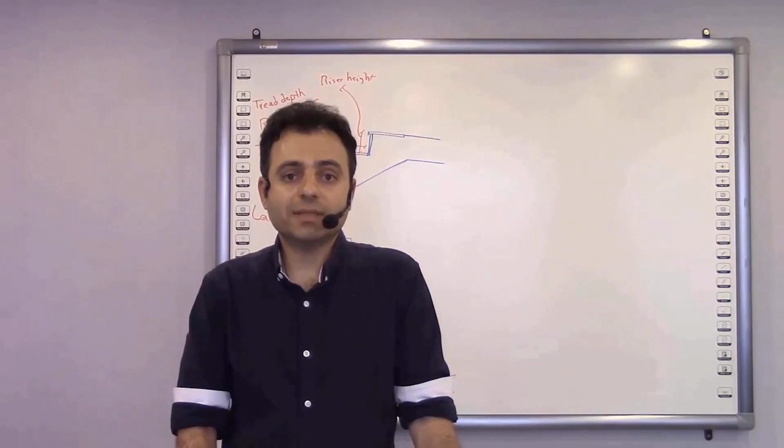In this session, we want to discuss the stairs. But before we start analyzing it, I want to explain something to you and also ask you a question. Until now, we've learned some of the tools like the wall, the doors and windows, and the floor. Now, imagine, for example, something like door and window. If you remember, these two had two types of arrangements. One of them was properties, and the other one was type properties.

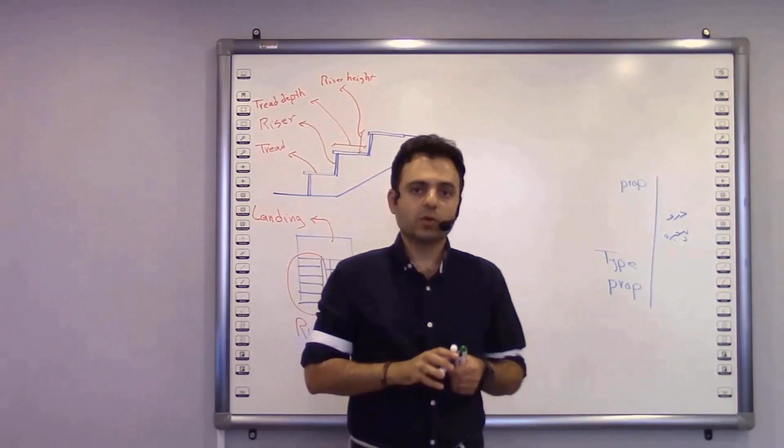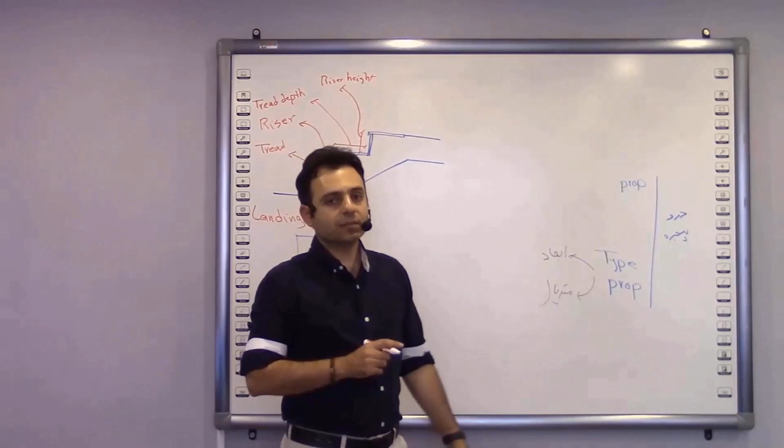And if you remember, properties is the palette that is always in your page, but type properties is the one that when you click on edit type, you can see some settings. That's type properties. Now, about door and window, what settings did we have in properties? Or what did we have in type properties? Can you say? For example, in type properties, that's right, we had dimensions and also materials. But what do we have in properties? That's right, OKB, or the right way to say it is sill height. We have this in properties too.

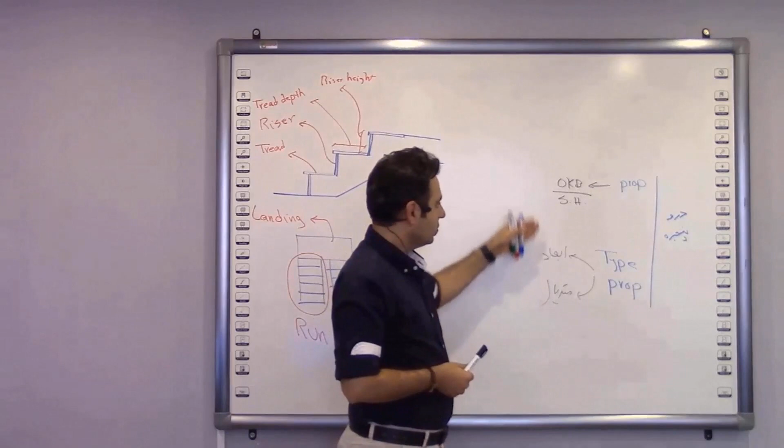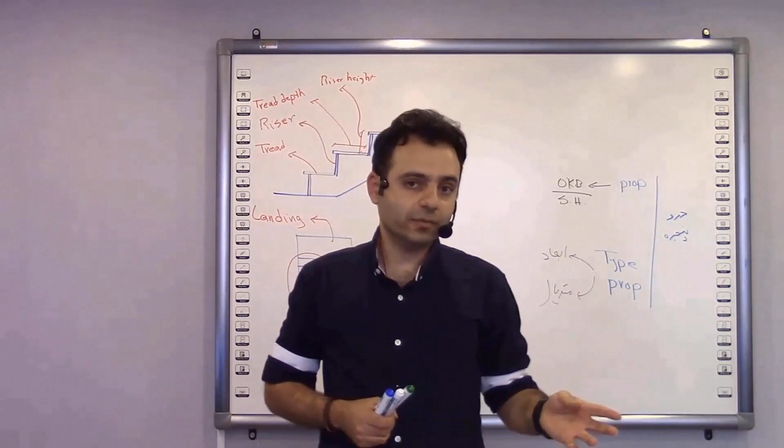Now there's a question here, and that's why it has divided these parameters into two groups, some of them in properties and some of them in type properties. Why? Or for example, why isn't the OKB in the type properties? Or why isn't the dimensions in the properties? The main reason is that if we change the parameters in type properties, the rest of the parameters will change too. But the parameters in properties, when we want to change them, only that selected object will be changed.

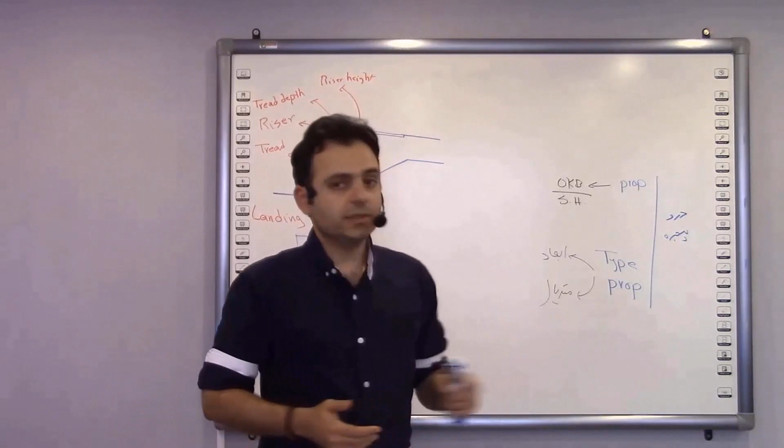So here we can say that properties is about the separated and single features of an object that if they change, the rest of them will not. But type properties is about the features of the objects in the same type that if you change one of them, the rest of them will change too. That's right. So today we want to talk about the stairs and also analyze the properties and the type properties of it. But before we start anything, we need to know the names of different parts of the stairs. Well, I'm sure you're already familiar with them, but I just say it once to be certain about it.

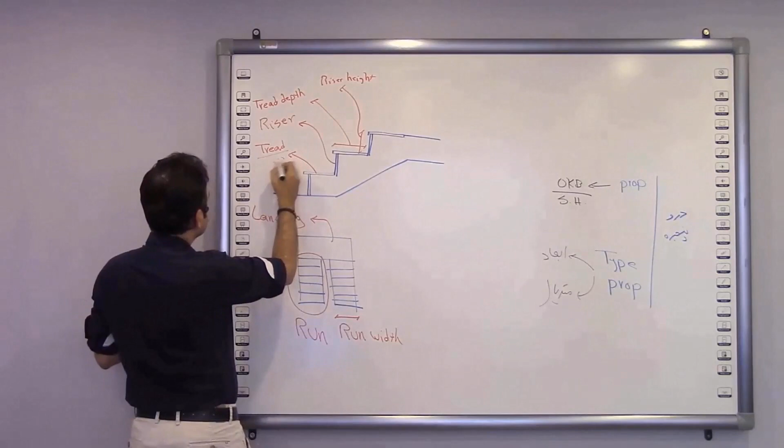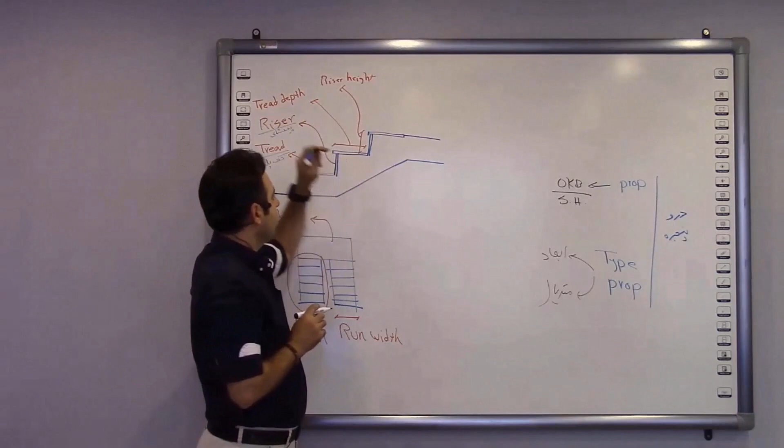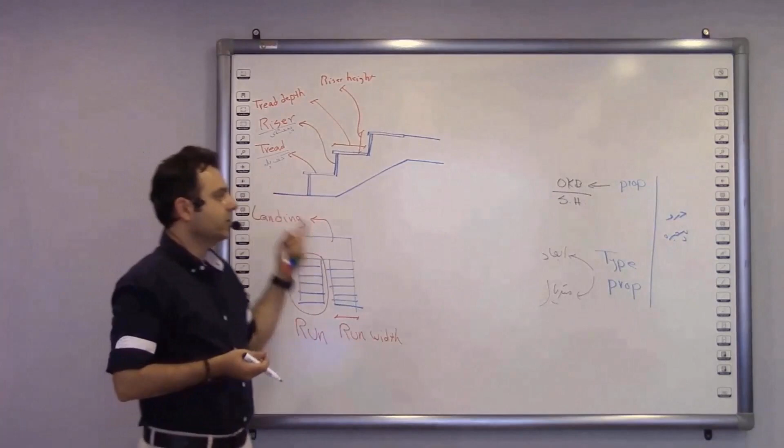Now, this is a section of the stairs, and as you already know, we call the floor of a stair the tread, right? We call this part of the stair the riser, right? Riser. The size of the tread is called tread depth, alright? Tread depth, the size or depth of the tread. And the height of each stair is called the riser height. You actually need to know these expressions and words, because if you don't, when we want to go for the properties and type properties of the stairs, you cannot recognize them.

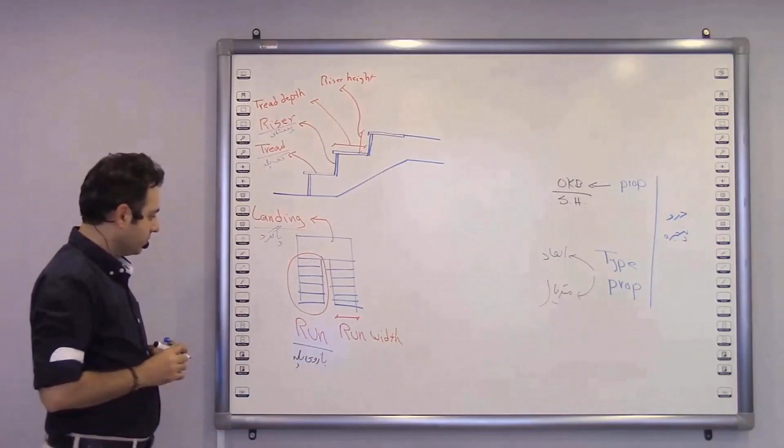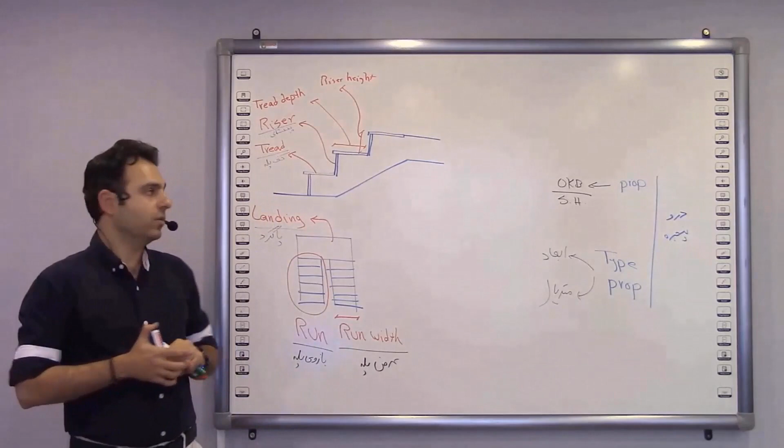Alright, let's go to the plan. Now imagine that we have these stairs, and what is this part called? We say these stairs have two runs, so we call each of these a run. So these stairs have two runs. Now what is landing? Well, definitely it's so clear. It's the landing, where you land. This is called the run width, which is still clear. The run width. So, as I told you, these expressions are really important. You need to know them all because you're going to use them a lot when you go to the software, and well, you need to memorize them all so that we can go to arrangement of properties and type properties.

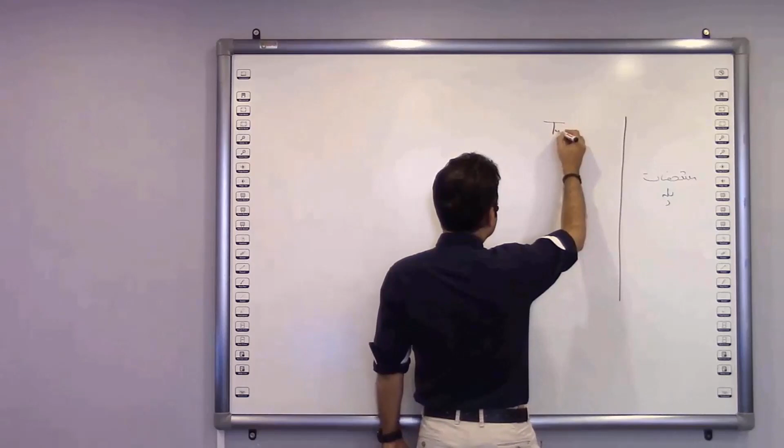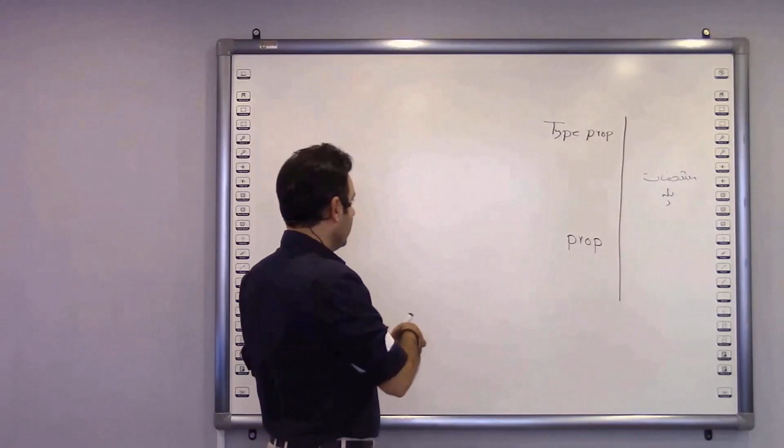So let's go and analyze the features of the stairs, which is properties and type properties, and now we know the difference too. So the features of stair. And just like we said, stair, just like the rest of the objects, includes properties and type properties. First of all, let's go for the type properties. When we want to arrange an object, it's better to go for the type first. It's actually from whole to fraction. So type properties and then properties. In type properties of stairs, we have three main arrangements.

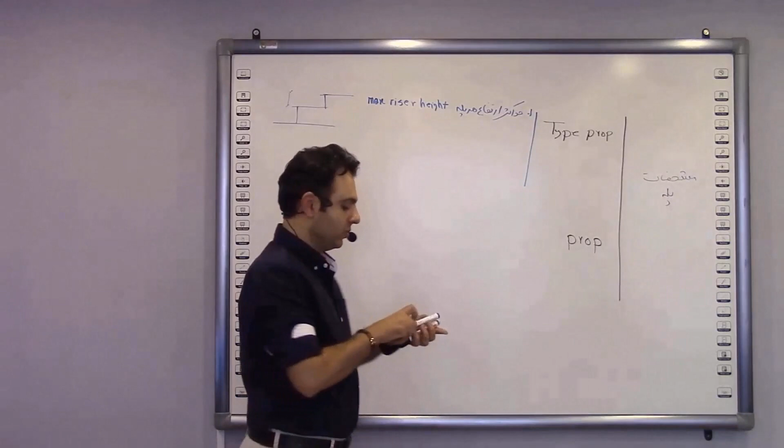1. The maximum of each stair riser height, right? For example, if this is our stair, we should say the maximum of this height here. Alright? The maximum riser height. How much do you think it is? Well, I should tell you that it's usually 17 in the residential buildings. But I say, for example, 18. Why? Because I want to have more space. Maybe even 20. Why again? Because, for example, I want to have a MEP stair. Actually, I can manage this maximum riser height. It can be 20.

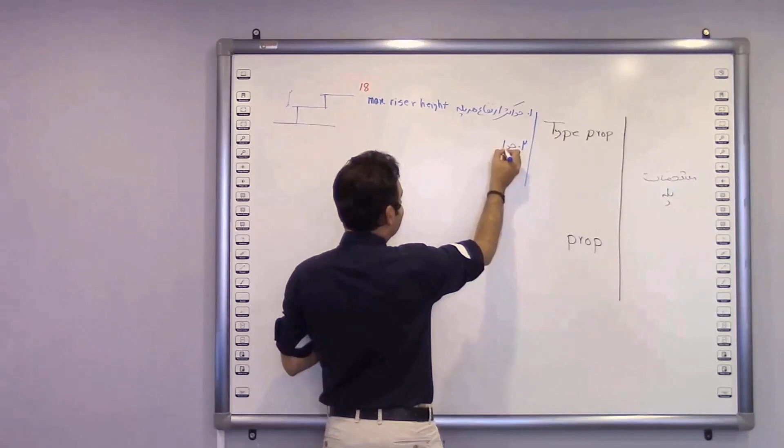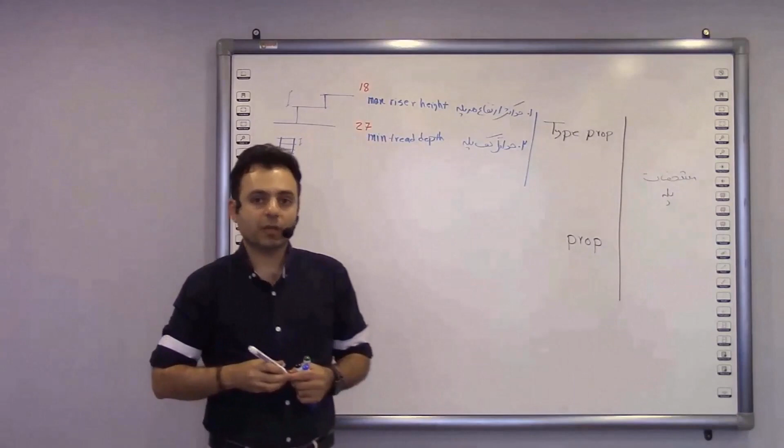Now, number 2. The minimum tread depth. That's right, the minimum tread depth. And actually, if this is our stair plan, we should say this must have a minimum. Now, what is it? What do you think it is? Well, we know that it's usually 30, but I say it's, for example, 27. Maybe sometimes I want to have a 28 centimeters tread depth. It can be even 30 because I said it's minimum, if you pay attention.

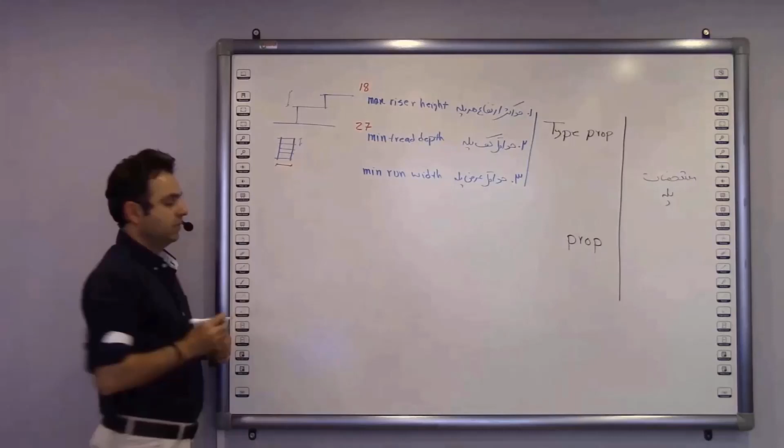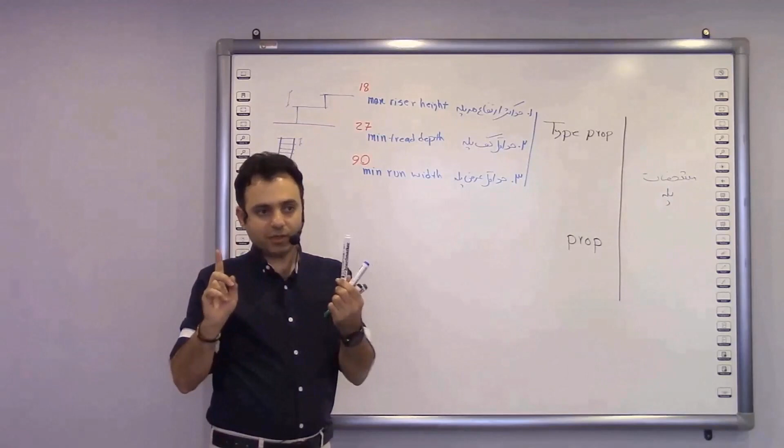Now, 3. The minimum run width, alright? The minimum run width. That, if I want to show you in the plan, it's this, alright? The minimum run width, which is usually 90, but we don't want it to be less than 90. And do you know how they calculate this 90? Actually, they consider the width of each person's shoulder to be 60 and 30 for the space around that person, which becomes 90. These are 3 parameters of the type properties.

Now, let's go to the properties. In properties, 1, the height of the entire stair. And this is actually determined by the level. We say, for example, level to level. Alright, for example, level 2 to level 3. 2. The actual tread depth. Alright, let me say it again. The actual tread depth. That's right. And actually, I will explain it to you later more.

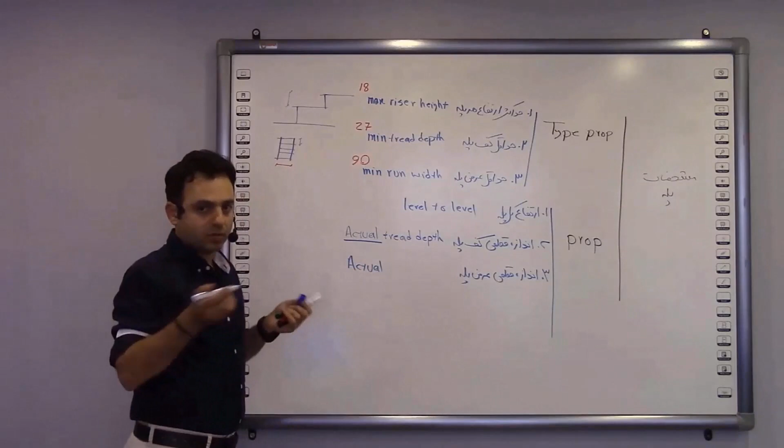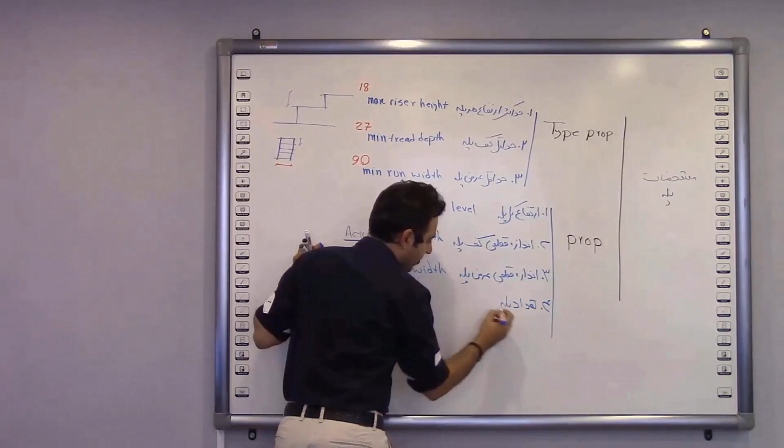Now, 3. The actual run width. Again, actual run width. Actual is actually there. That's what it means. It's real. Now, number 4. That's right, the number of the stairs. Or actually, the right way to say this is the desired number of stairs. Alright? Desired number of stairs, because it's the number that we want.

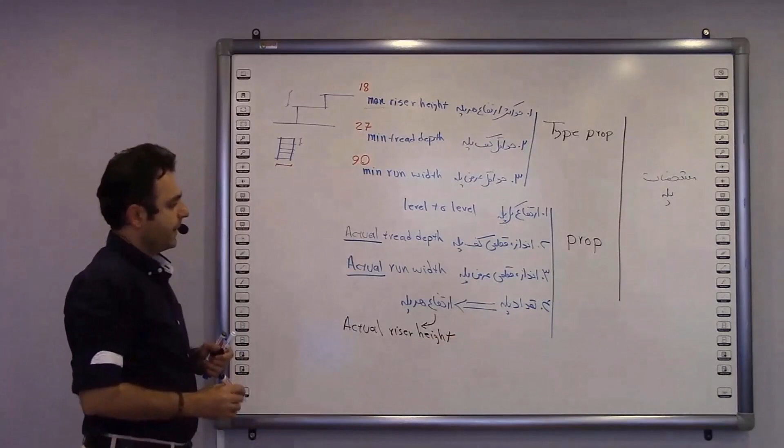It also gives us the actual riser height, right? The actual riser height. You know, we had the maximum riser height, now it gives us the actual riser height. And actually, this part, this desired number of stairs, has a lot to talk about, and we will discuss it later. Alright.

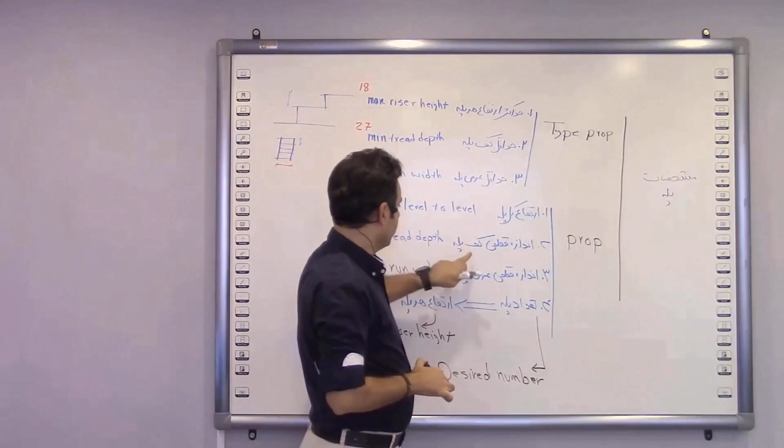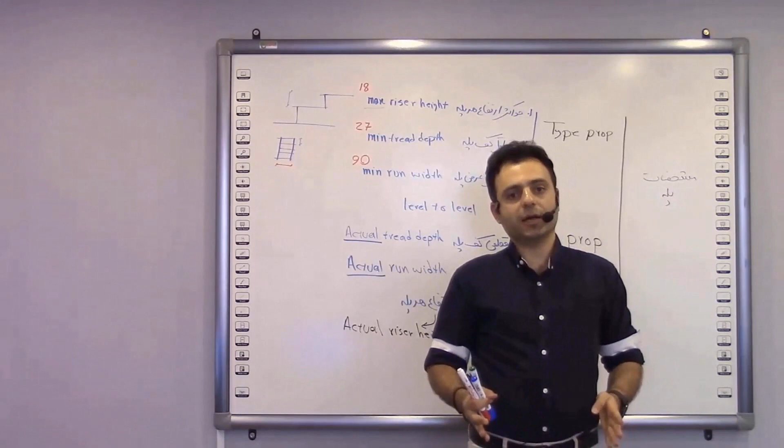Now, a question. Why do you think that we talked about, for example, this tread depth 2 times? Why? I mean, it has a number here and it also has a number there. Well, I can say it's so clear because here we are making some standards, right? We say, for example, all the stairs must be at least 27. We create a rule and then we start drawing that stair. And when we want to draw a stair, we say, what is the actual tread depth or run width? For this specific stair, we use this actual, alright?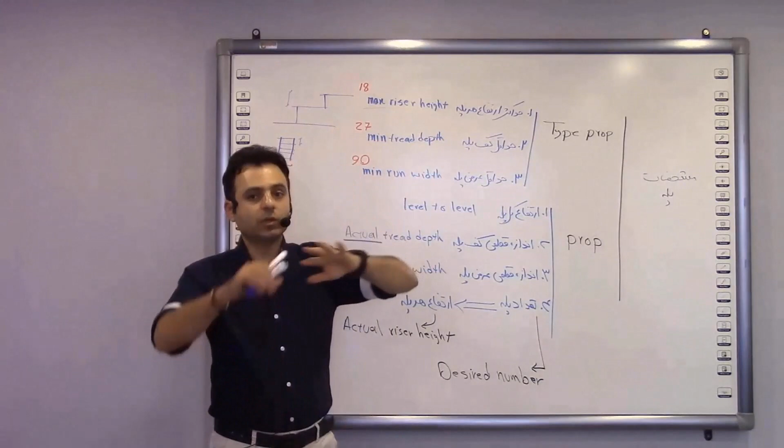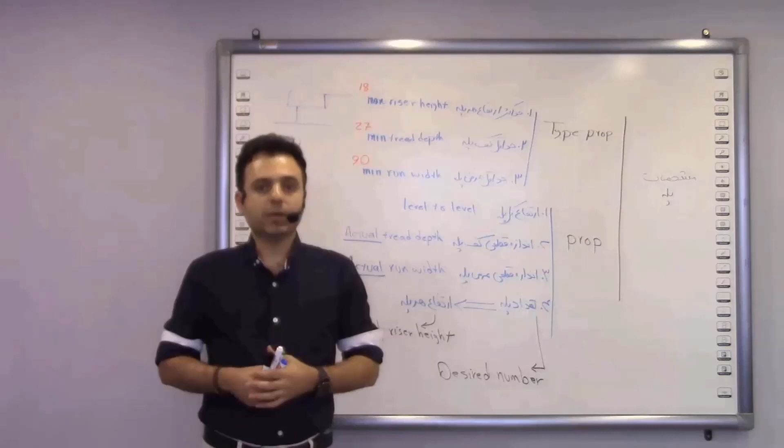In type properties, we create some standards that include all the stairs. But properties is about the specific properties of that stair. And when we say actual, it's about the dimensions that we're going to draw in the same moment and the same stair. So, in order to learn this completely, first of all, I draw an example here, and after that, we will go to Revit so that we can understand it better. So, to start, let's draw these stairs first. And don't pay attention to my drawing, just pay attention to the parameters that I give you.

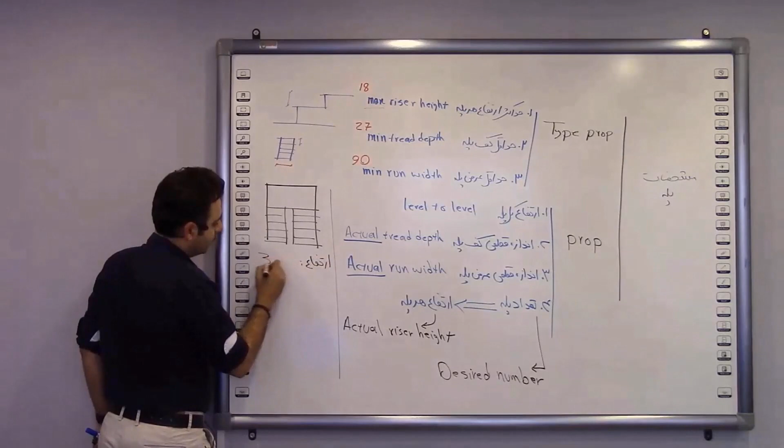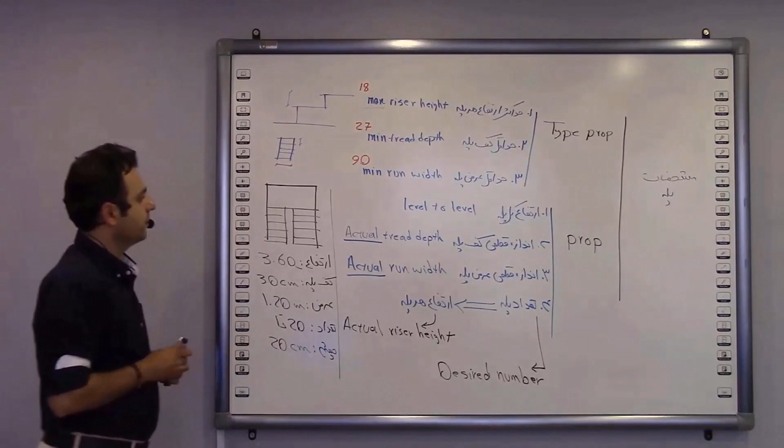The height 3.60, the tread depth 30 centimeters, the run width 1.20. Then we have the desired number of stairs, which is 20. So let's go and draw this and also try some other examples too so that we can understand it in a perfect way. Let's go.

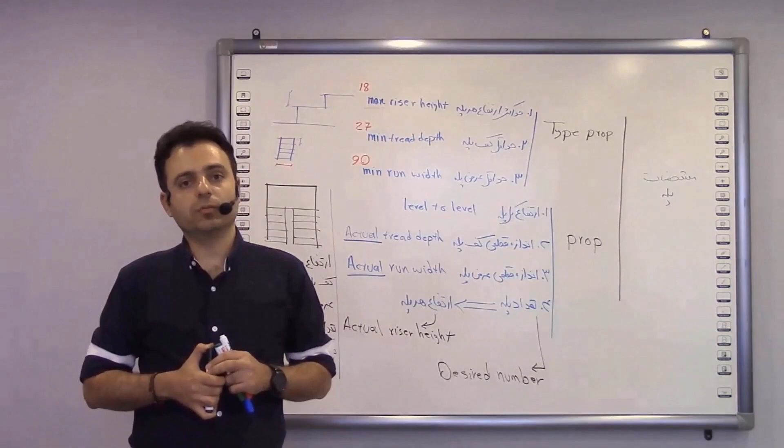Alright, now we are in the software and we want to analyze all of this in Revit. To activate this stair, first of all, we go to the Architecture tab and then Circulation, and then we can see the stair. In the old versions, we had an arrow by the stair that had 2 types. One of them was a sketch, which fortunately has been deleted because it was never useful. So I click on stair. Now, as usual, we first manage the settings of the type properties. So I click on edit type and then duplicate. For example, the exterior stairs.

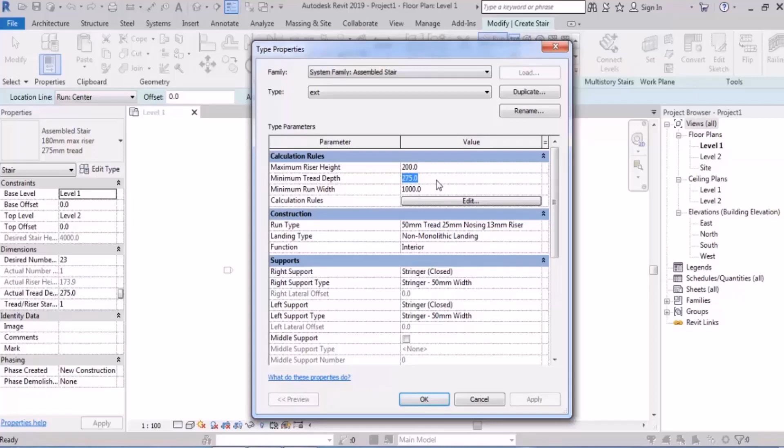And then we have the 3 parameters that we talked about, the maximum riser height. Now in these stairs, the height of each riser is 18, but we want to consider it 20 so that we can have more space. Maybe we want to draw an MEP stair that we need to be 20, more than 18. We know that the standard is 18, but I consider it 20. Then we have the minimum tread depth. The tread depth that we want to draw is now 30 centimeters, but we want it to be 27, alright? It's not that important actually.

Then we have minimum run width. In the example, it was 1.20. Now I want it to be 90, alright? And remember that it's minimum. So we managed 3 dimensions here, the riser height, tread depth, and the run width. And all of them were minimum.

Now, the settings in properties. First of all, I said we should determine the height of the stairs, and it should be from level to level. From level 1 to level 2, and here it tells you about your desired stair height, which is 4 meters. Remember something, that during drawing the stair, you cannot change the height of the level. For example, if it is going to be 3.60, you can't change it anymore.

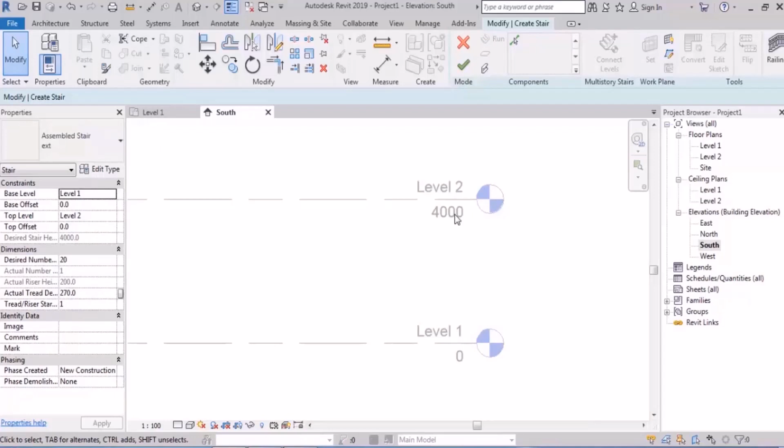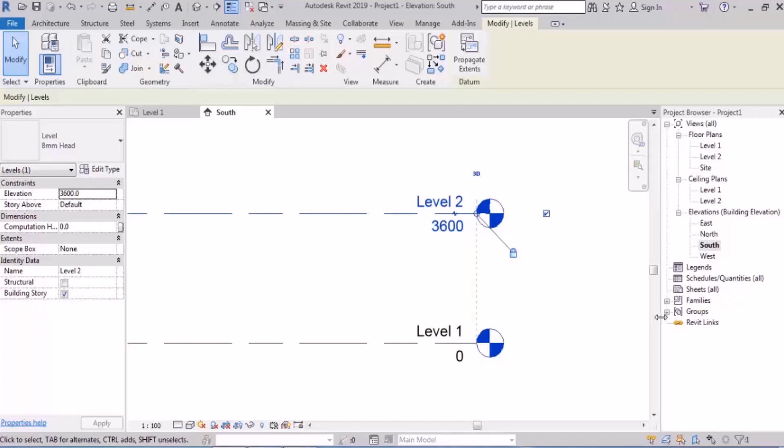So what should I do? I should click on finish here, and then it tells me you haven't drawn anything. Why would you want to finish? So I have to cancel it and then exit. And after that, edit my level height. And then I go back to the stairs. So remember that. Well, we can draw it and then change the height, but it's not recommended, right? So always remember to check the level height and then go for the stairs.

I go back, architecture, stairs, edit type, duplicate. Then it says that we already have this. Well, we made it before. 200 for the riser height, 270 for the tread depth, and 90 for the run width. And here it's from level 1 to level 2, the desired stair height is 3.60. And now we go for the desired number. Now this desired number is going to be 20, isn't it?

Now a question. Can I consider this desired number 200? Now you need to answer based on the previous standards. I told you some rules about minimum and maximum, if you remember. So, can it be 200? What is your answer? I'm sure you feel that 200 is a very strange number for this, don't you? And you might think that we face an error now, but we don't. Why? Because when it is 200, the actual riser height will be 18 millimeters or 1.8 centimeters. And did we have a minimum for riser height? No, we just had a maximum. So we will not face any error.

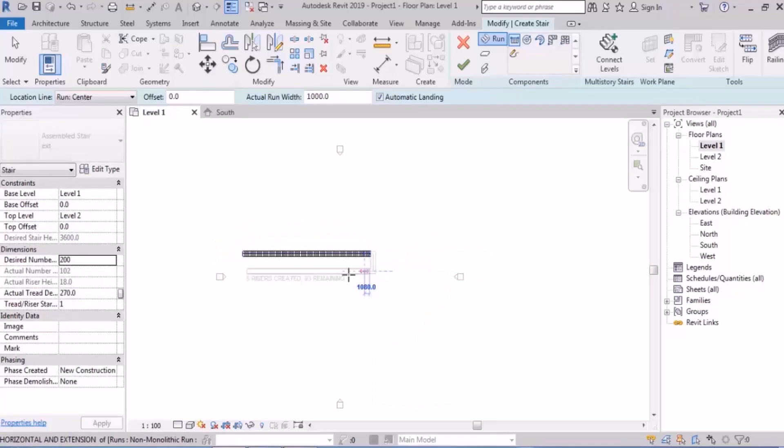But you might think, so what? What is the use of it? Well, I tell you, it's so useful. And what do you think the function is? Well, I should tell you that we can use it for a ramp. You see it? It's so useful, we can use it for a ramp. You know, these ramps that are for cars, and that's it.

Now, one more question. Can we change this desired number to 10? If it is 10, the actual riser height will be 36, right? And it will be more than that maximum number that was 20, if you remember. So when I move my mouse out, I will face a warning. Now, one more thing. I want you to know that what we are seeing now is a warning, not an error. Here it warns us, it tells us something. Now what is it saying?

It's telling us that the actual riser height, the riser height that we are drawing now, is greater than the maximum riser height, right? The maximum was the standard. The actual riser height is the riser height we are drawing now. Alright, the actual riser height, when the desired number is 10, is more than the maximum number that we determined. And then it tells us that we need to change this in order to avoid this situation. So maybe I say, okay, I get it, but I want to keep doing what I want to do. So it doesn't stop you, but it warns you that you're going against the standards you defined yourself. Anyway, the desired number is 20.

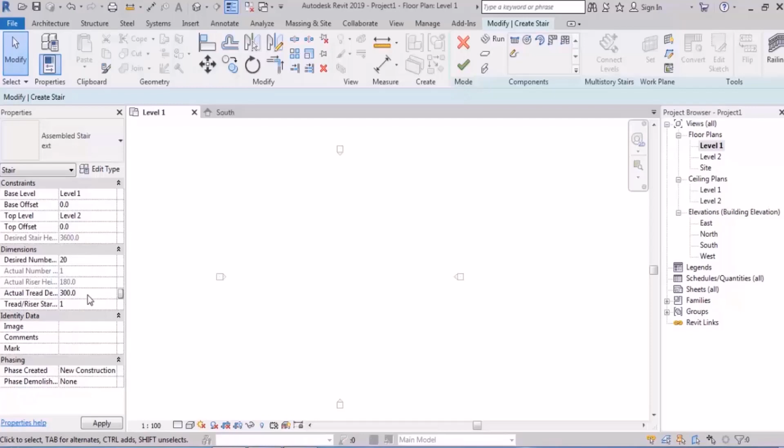Here we have the actual tread depth. The actual tread depth, which is related to this stair, it's not a standard. We say that the actual tread depth of this stair is going to be 30 centimeters. Pay attention to one thing. When you have finished these settings and you want to start drawing, you need to click on this run here, and it's usually already activated, but if it's not, you click on it and you see some properties here too. So if you see they're not here, it means that you haven't activated the run. So when I click on it, I can have access to the actual run width too. The actual run width would be 1.20.

Now everything has been done. The height I said was level 1 to level 2. The desired number, the actual tread depth, and here we have the actual run width. Now let's start drawing. To draw the stair, first of all, you need to choose a spot to start it. So let me zoom in a little so that you can see the words better. So I go to Options, Graphics, and I change the size of the words. And you don't need to do this, actually I did it so that you can see it better. Alright.

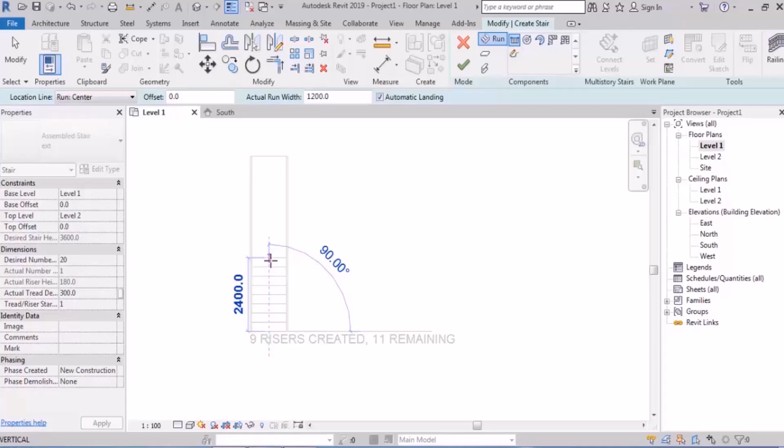Now, check this out. When you click and you start drawing, as you can see down there, it shows you how many risers have been created. As you can see, it says until right now, 9 risers have been created and 11 risers have remained. Now I want to have 10, so I go up a little more, and now that's right. And now I continue this to the right a little, and then I click, and that's it.

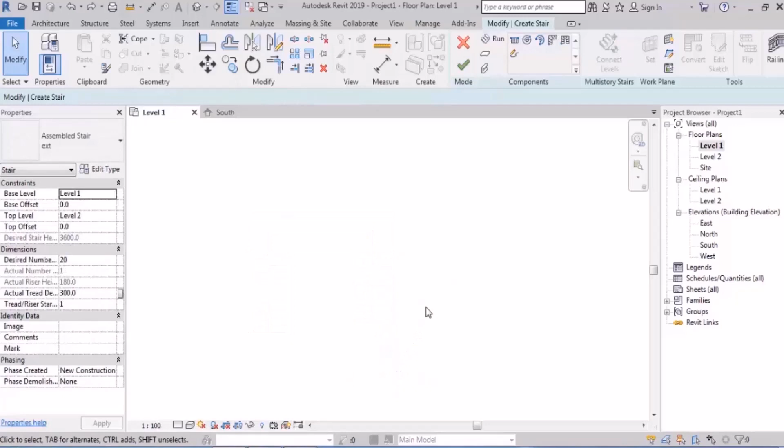I go down now. Now here I don't need to count anymore because it doesn't get more than it is, you know. And then I click. Let me undo and do it again. So we were supposed to click on run if we didn't have these properties here. The run width was determined, so let's start drawing.

First I choose a spot to start. Then you should drag it up. Now we have 20 stairs, we want 10, alright? So I drag it until here and then click. Then I continue that to the right, again one more click, and then drag it down. I've seen some people after they click they start drawing from here, but it's wrong. You see, that's the right way. Alright.

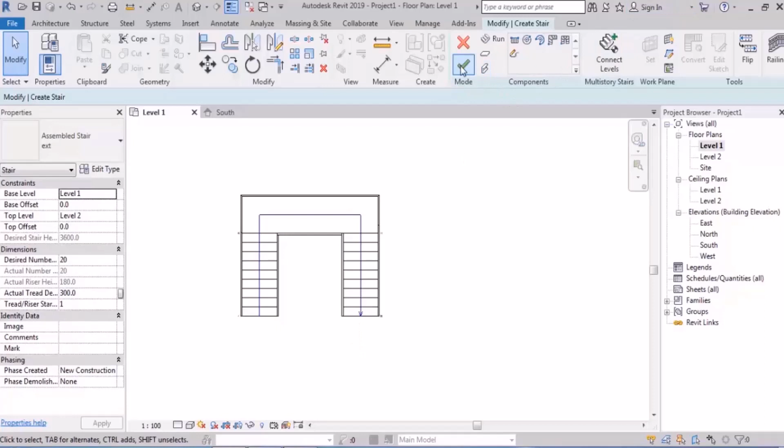Then I should click on finish and it shows me the rails too. And don't pay attention to the warning about the rails. We will definitely talk about the rails, but the warning is not important at all. It actually says the rail is not continuous, which is not important. Anytime you see this warning, just close it. So let's go to the 3D and take a look at it there. You see, this is it. Now let's go and analyze it more carefully and analyze the details.

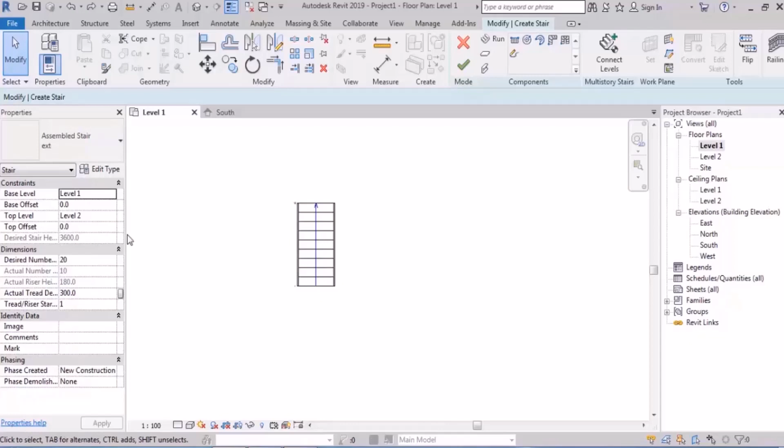So let me undo. Alright, the first run was drawn, but for the second run we need to manage some things. So let's go to the properties. But before drawing the second run, let's learn some things here too. We talked about the height, but here it's really important, try to understand it. What do we have here? The desired number of risers. Alright, the number of the risers that I want. It says that I have considered 20 stairs.

Now, when it is 20, it has calculated the actual riser height based on the desired stair height. Alright, the actual riser height or the riser height of each stair, just like you can see in the picture. So the desired number of risers is the number of risers that I want. Now you tell me this one. What does it mean by actual number of risers? That's right, it's clear from the number. Now we have 10 more left, and until we draw the desired number of risers, the height of these stairs will not reach the desired height. So let's go and draw the next 10.

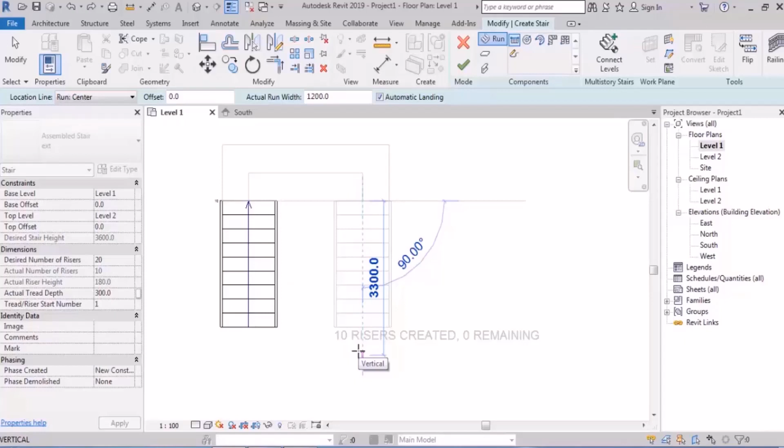So, while you're drawing these stairs, pay attention. Where do you think the axis is? Hey, where do you think? That's right, it's exactly in the middle. This is exactly like the wall. But what was it called there? What would we call the axis of the wall? Exactly, we called it the location line. And we have it here too, if you see. Now, this location line has three common forms. Left, right, center, and forget about those two. They're not going to be useful.

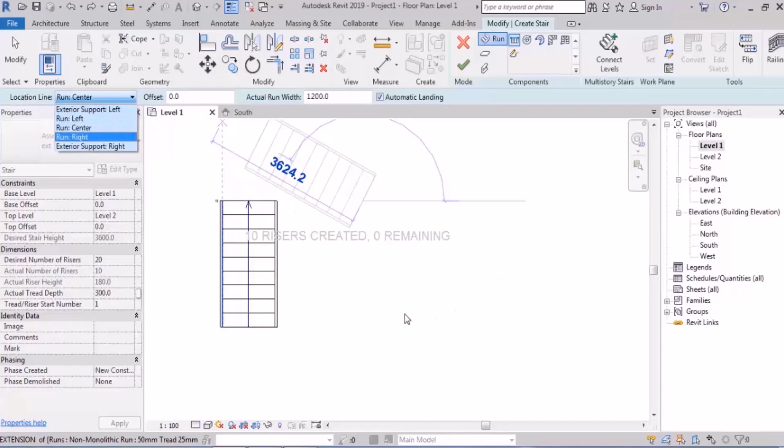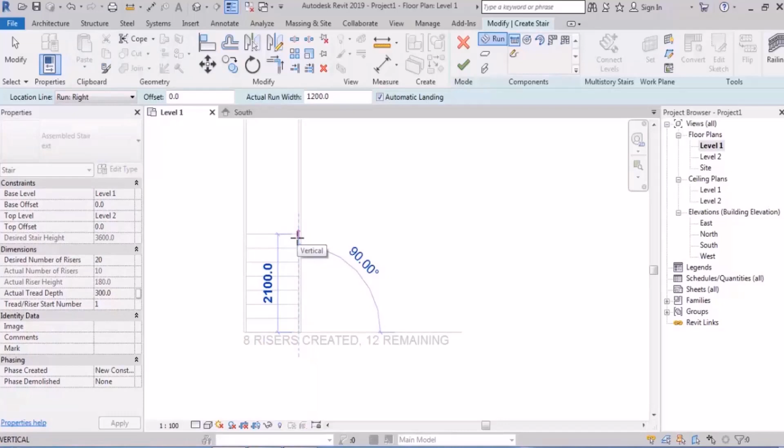Now, a question. Which one would be better to use? The right, center, or the left? Well, it has two forms. Either you place it in the space between two rows of the stairs, or you place it by the object that you're drawing the stair based on. For example, you're drawing based on a wall. But do we have a wall here? No. So our location line must be based on that space I told you about. So I delete this, and this time I draw it more carefully and with the location line. I click on run, and because that space is on the right, I click on right. And now I draw. And I keep drawing until I see 10 and I leave it.

Now, pay attention. I want to draw the next ramp and I don't want to have that space anymore. I want it to be 0. And you already know that based on some new rules and the standards of firefighting, we shouldn't have these anymore. It's actually because this space leads the smoke during a fire to the top. So we shouldn't have this space. But we practice both. So if I don't want to have this space, where should I click and drag down? As you can see, we have a gap in here. And remember that this gap is a structure by the stair. And we don't always have this.

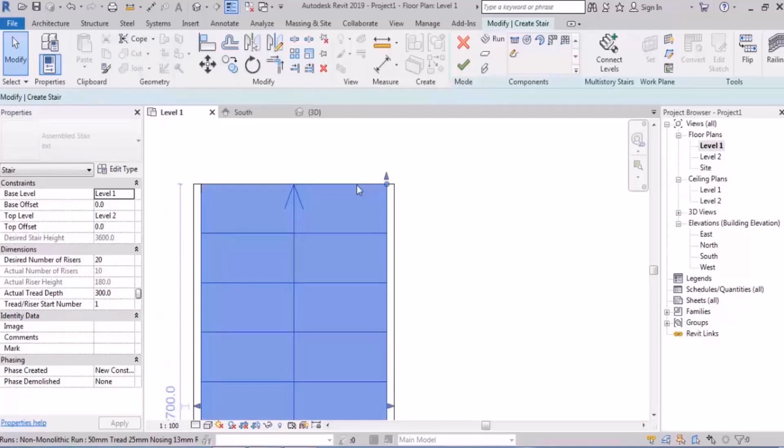And when you're starting to draw the next ramp, you should not start it from this part, because when it gets deleted, you will have extra space. This is your stair and you need to draw from here. I click on it and drag it down, and it's over. And now there's no space, alright? Now, what should we do if we want to have that space? For example, I want it to be 20 centimeters.

When you click on this run here, you see offset. But what does it do? For example, I enter 30 centimeters. Pay attention to what it does. Now, when you want to start drawing the next ramp, it places 30 centimeters next to it. Alright, 30 centimeters next to the first ramp. So it can be a very good technique. For example, I change it to 20 and then I start drawing from here, but not here. And in the end, that space is created.

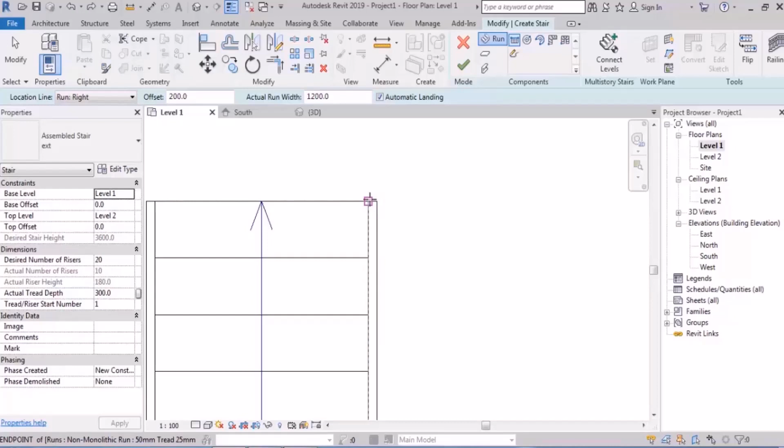So the technique of drawing the space between two rows of stairs is that after clicking on run, we enter a number for offset as much as we need, and then we click on the width of the stairs, not the structure, the width, and drag it until down. And now it's ready. You can click on finish. And this warning, I said ignore it.

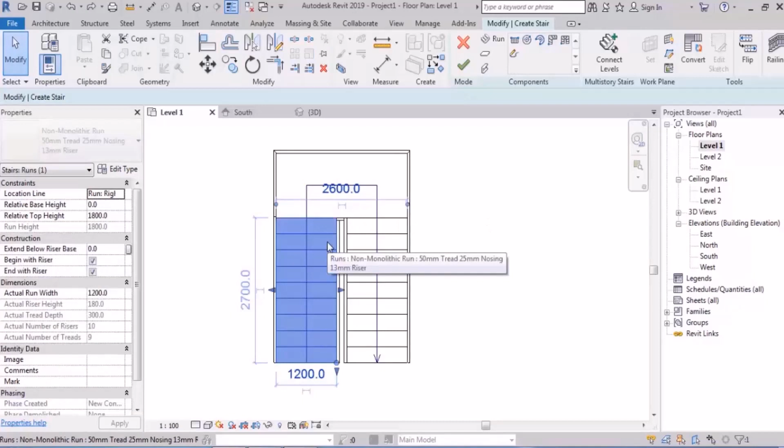Now, next subject. In these stairs, actually the ramp which is going up, places with one riser ahead. And this is a rule. If you know the reason, it's even better. But if you don't, just know this rule. In the first session, we said that when you select an object and then click on move, if you don't activate this disjoin, it stretches, right? Do you remember?

Now, if you want to move without activating this disjoin, like this, it will have one riser ahead. And even that space for landing will be edited automatically. So, what happened? The ramp which is going up is selected first. Then I click on move and I don't activate the disjoin. And then I click.

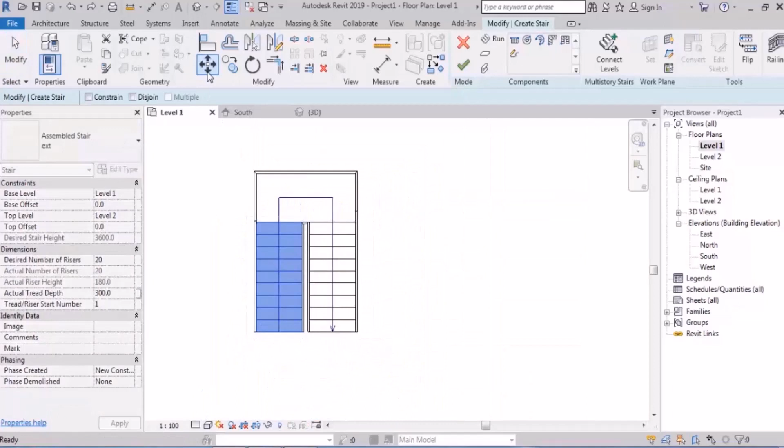Now, what do you think will happen if you forget to inactivate this disjoin? Actually, this will happen. As you can see, your stairs won't be right anymore. So, I said that one of the forms of the location line is that it's on the side of that gap between two rows of the stairs. I also introduced another form, aligned with an object that we are drawing based on.

So, if you agree, let's draw a wall first. A wall with any dimensions. Now, inside this, I want to draw stairs, and you will learn both location line and also aligning. So, I select the stairs, level 1 to level 2, the number of risers 20, the tread depth 30 centimeters, the width is 1.20 and I don't want the offset for now.

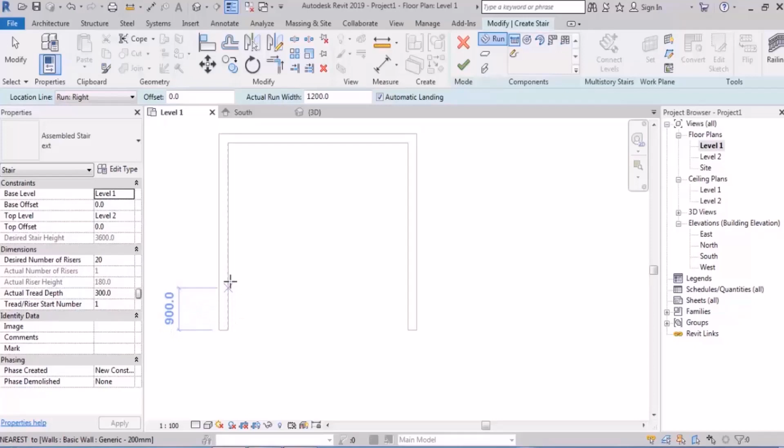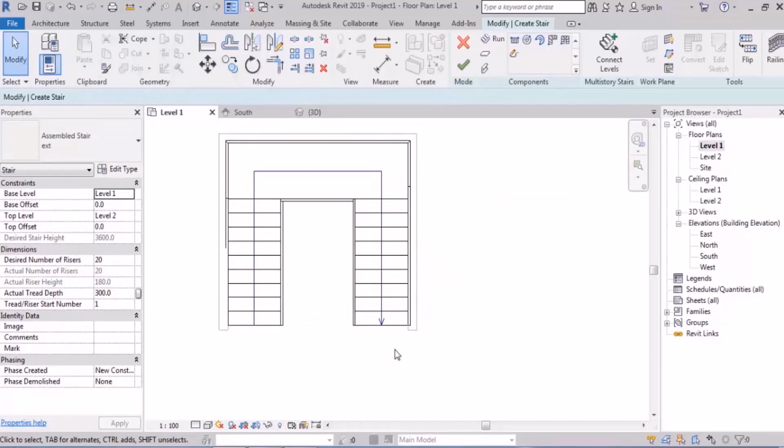Now, the ramp of our stair is about to be aligned with the left side of this wall, so the location line must be left. So I pick it up and drag it until it shows 10. Now, this side, I click from the beginning of this and drag it until here. See? And now I want to set that rule I told you about, one riser ahead. Why did this happen? That's right, the disjoin must not be activated.

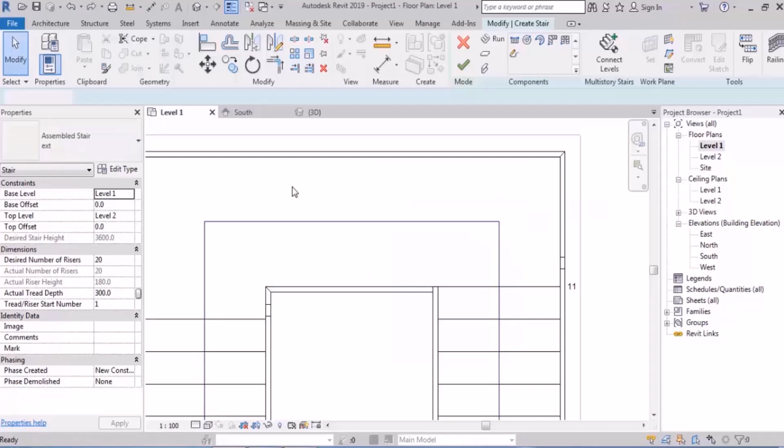Now, if you pay attention, you see this structure of the stairs is aligned with that wall. Let me make it wireframe. You can select the entire stairs and move it. You can, for example, bring this from here to here. Move it anywhere you want. And I will tell you more examples about the location line so that you can understand it better.

Now, let's go and see the different types of stairs. This one was a standard type of stairs with two runs, and I said you need to create a gap between two runs of the stairs and also one riser ahead. Now, 3-run stairs. I select the stair, level 1 to level 2. The number of risers 21. Tread depth 30 centimeters. The width 1.20. I don't have any wall, so it must be right.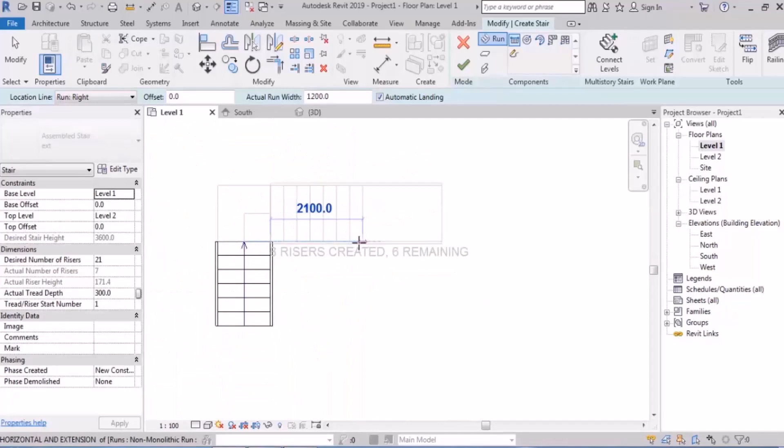7 risers. So I click and drag it to the top. Now this is one of the 7. And then from this part, not that part, I draw the next 7. Now, that rule: each ramp that goes up must have one riser ahead. So I select move and make sure that disjoin is not activated, and that's it.

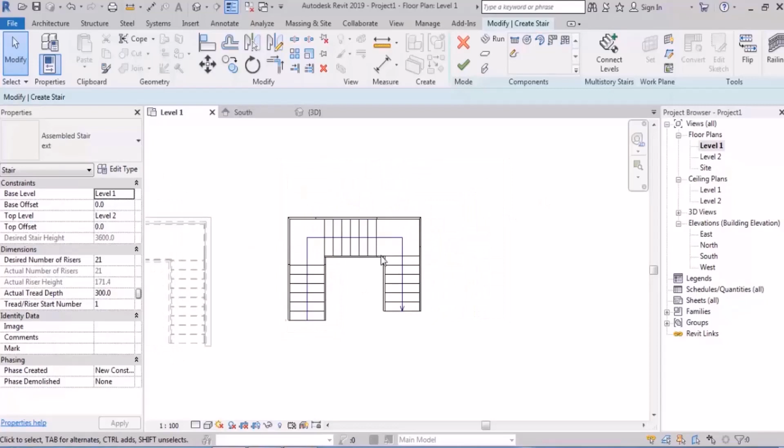Now, some people select this and move this one. Well, it's definitely wrong. So what should we do? We need to select both ramps and then move. Did you get it? So, in the second ramp, we must select both the first and the second ramp together and then click on move. Now, let's draw a 3-ramp stair based on a wall. For example, we have a wall like this.

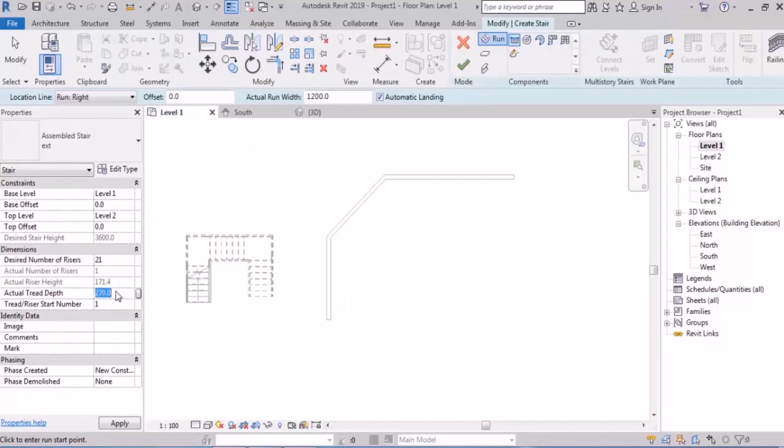I arrange all of these. Now I select run, and again my location line must be left because it's going to be aligned with this wall. So I click on left and draw it from here. How many? 7. You might also wonder how I know where to start from. Well, I will tell you all of these later, don't worry about it now. You can start from wherever you want, it can be edited very easily. So I click here and draw 7 more, and even from here, 7 more.

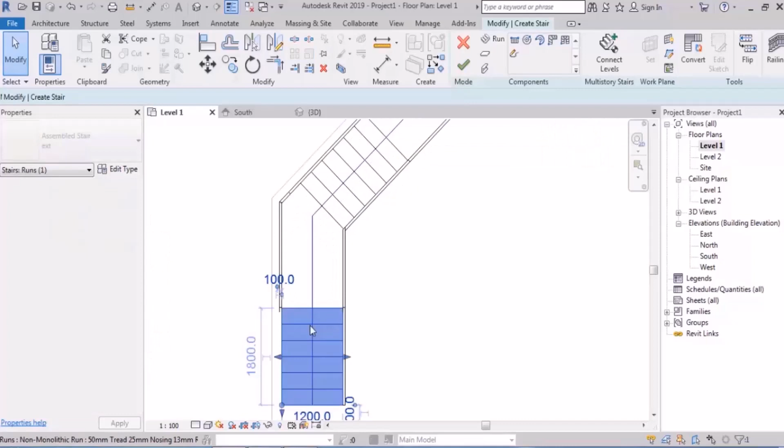Now let me show you how easy it is to edit. I select this and then click on move, and the disjoin is not activated. So you move it from here to here. Then I select this one and move it from here to here. You see that? Now this one I click on move and I move it here. Now you might think it would be better if it were in the middle. Well, that would be a good idea.

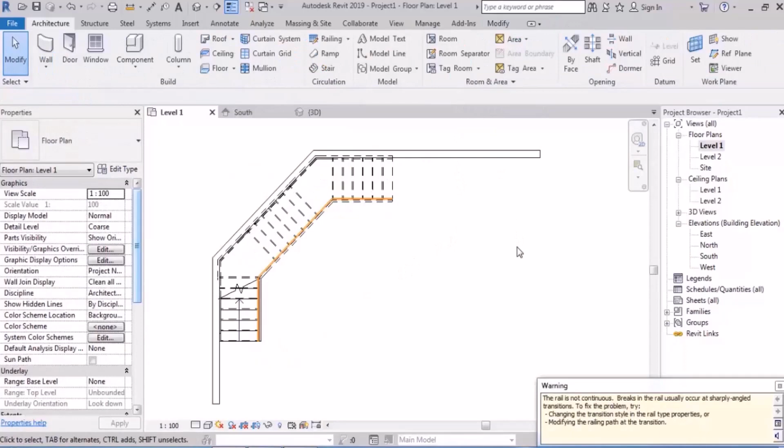So I move this one in the middle, anywhere I want. Actually now it's not in the middle. I move it again and you can see now it shows the midpoint. I place it. You can move it anywhere you want, and just like that you can draw 3-ramp stairs based on a wall. Now let's go and see other types.

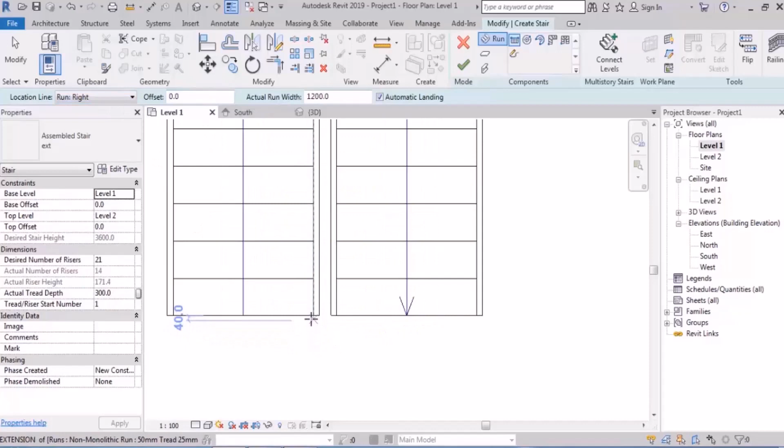The 3-ramp stairs where the 3rd ramp is on the 1st ramp. Again, it must be 21, and because there's no wall, the location line must be right. So 7. This time I want to make that gap, so I write 20 in offset, 20 centimeters. Now, the 3rd ramp is going to be on the 1st ramp, and I don't need the offset anymore either. So I click here and drag it again on this one. Let's see the 3D. You see? That's it, the 3-ramp stairs that are on each other.

Now a question. Does Revit inform us about the heads of the treads, if they're wrong or right? No, Revit has nothing to do with the tread heads, and we need to be careful ourselves.

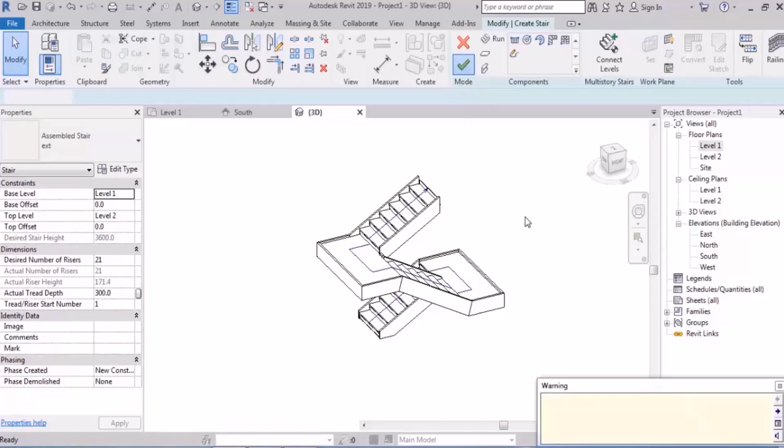Another example is the stairs with 4 ramps. So I click on stairs and the number of risers this time would be 24. The tread depth would be 30 and the width would be the same, 1.20. And the run would be the same, right? And the offset would be 20. So 2,6 here. Now I don't need the offset anymore. Actually, if you click on space, these numbers will be gone.

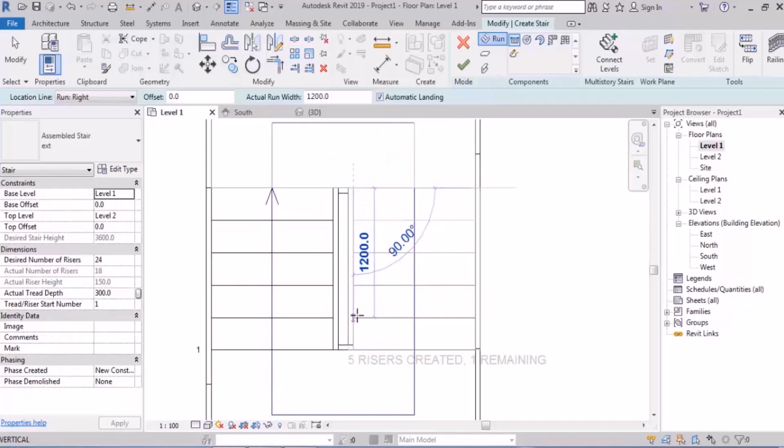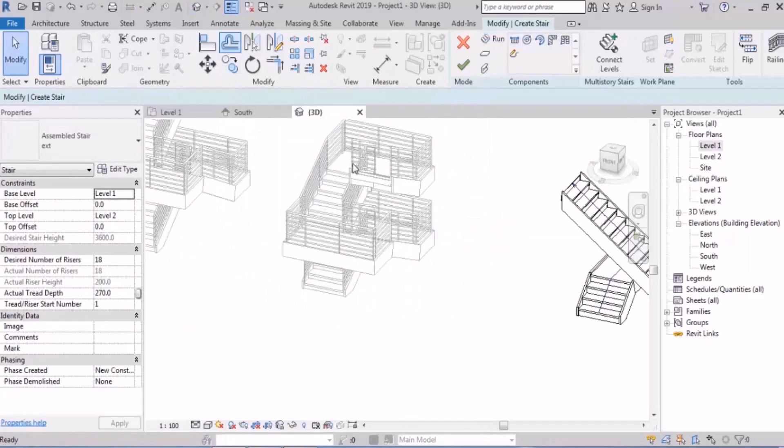I drew the 3rd ramp on it, and now the 4th ramp is drawn on the last ramp. Now the 3D, you see? A 4-ramp stairs that are on each other. Alright, then I click on finish and that's it. After that the railings are drawn too. We can also have stranger stairs, weird ones. For example, 3 here and another 3 here, and suddenly it passes over it. It's possible to do this, it's okay.

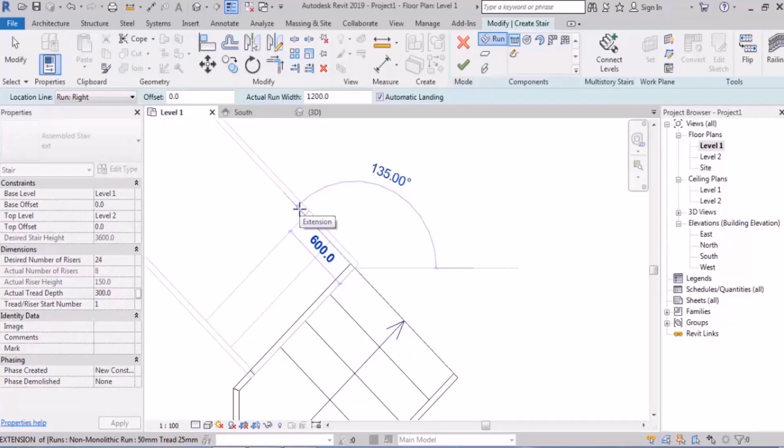The last example I'm going to tell you is the irregular stairs. But what does it mean? For example, I select the stairs and then I increase the number of the risers, and the tread depth would be 30 centimeters and the same width. Now, for example, I draw 4 here, and after that another one to the right, just like this. But suddenly I want to go to the left. Now my location line is on right, so I click from here to draw, but I see it's not possible. Why? Because the location line is wrong.

So we come to a conclusion here. While drawing the stairs, we might need to change the location line in the middle of the design, maybe to left, and then continue. So be careful about it. Now you see some numbers. If you click on space, they will be gone.

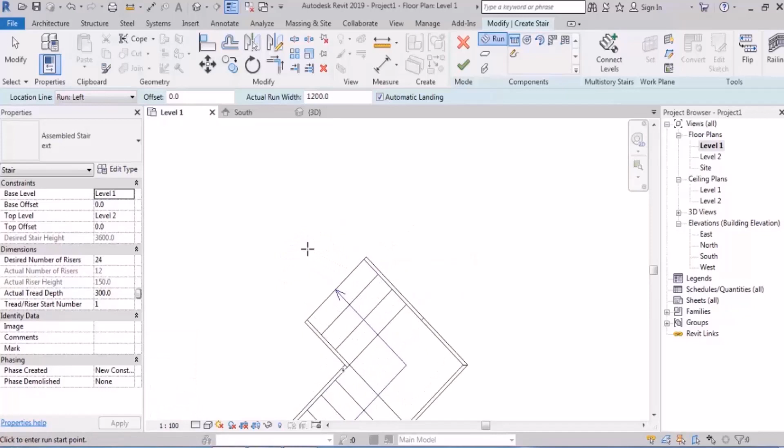There's also something else: some people start drawing the ramp from some weird place. You see? Just like this. And it will not have a good landing either. You see, what is this landing? And why would you want to start the next ramp from here anyway? You need to follow a rule. For example, continue from the rest of this and then change the location line. So remember to consider a rule.

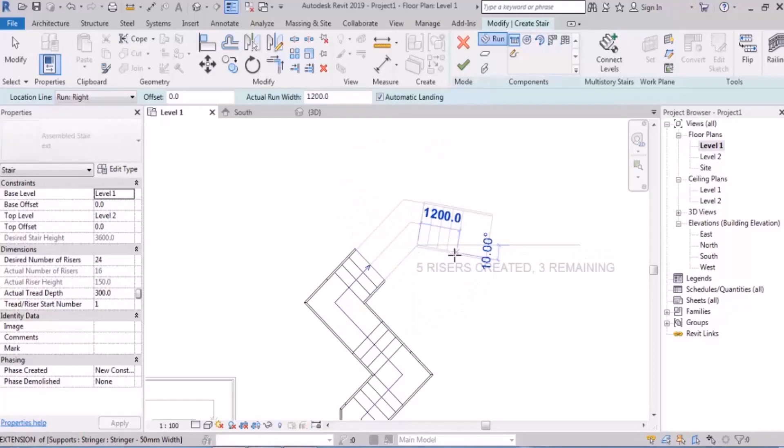Why would the next ramp start from here? Either it starts from here and goes this way or that way with a different location line. No, not from here. It wasn't good. Actually, maybe from here with the right location line, we can draw it like this. So, be careful when you want to start your new ramp.

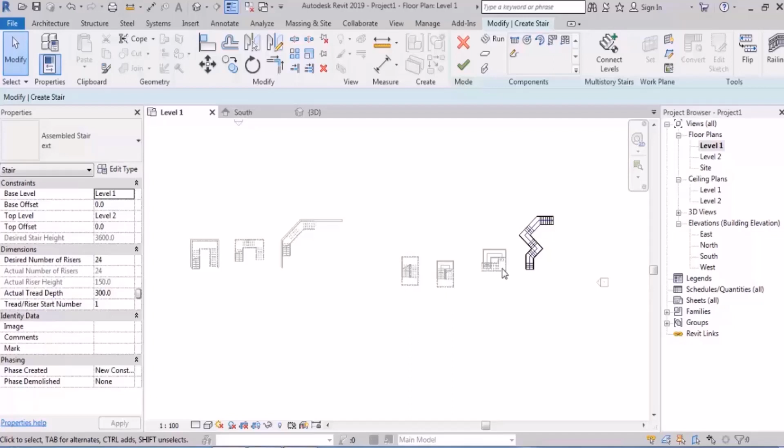Now, what are you supposed to do? Before anything, you draw that first stair with the rules. After that, you start practicing these stairs that I drew: 3 ramps based on a wall, 3 ramps that are on each other, the 4 ramps that are on each other, and until the end. You can watch this video and practice, and if you have a book, then you can practice based on that. Remember that the stair is our most important subject because it's always used. So start practicing.